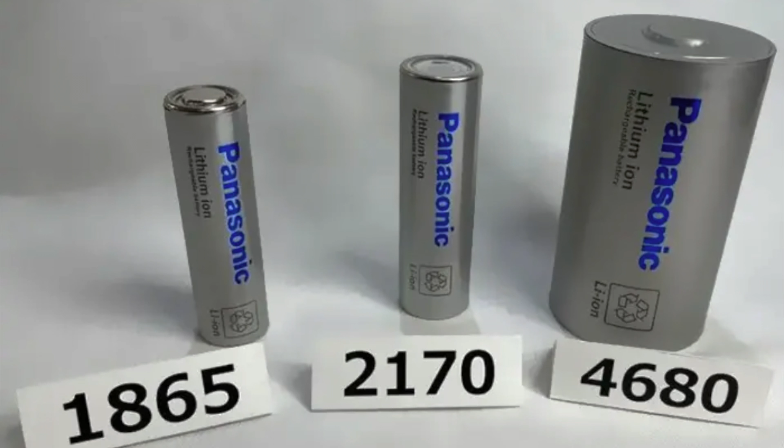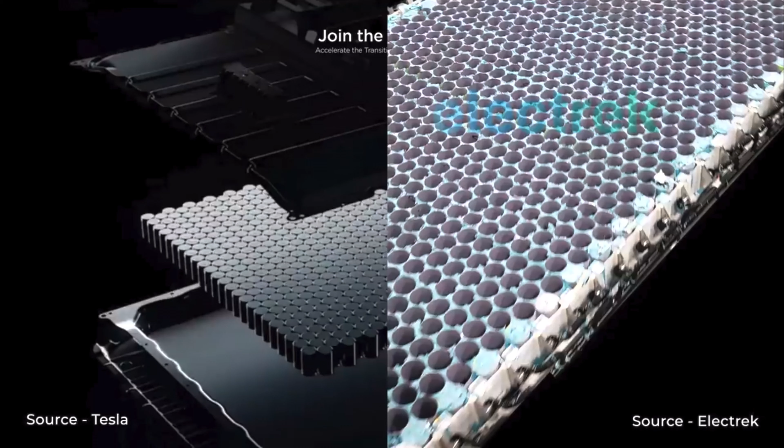Then, of course, you see the Panasonic batteries that have evolved for Tesla, and the 4680 is the largest battery that they make right now, and it's the one that's going to be going into future cars. And that structural battery pack will be using those 4680 batteries as part of the battery pack to get more power. So Panasonic and Tesla have partnered up to make bigger and more efficient batteries as well. It's really pretty cool.

Now, the 4680 refers to the size of the battery. It's how many millimeters around it is, how many millimeters tall it is, but it has an energy density that allows it to store a certain amount of energy in it. And these new batteries are remarkably efficient. You get 5 times the amount of energy out of it, which is really pretty amazing. Just how that works is really cool.

So of the old cells, you can take 5 of those away and replace it with 1 of these and get more kilowatt hours out of your battery and have more power. So these batteries are really efficient and use that property better. So this is really kind of an important step for Tesla and Panasonic to make in the battery industry.

It's always that question about how do you gain the efficiency and how do you make sure that your batteries are going to continue to perform at a level that you want them to do. And by continuing to create new battery types and evolving the thought on it, you can see that this one is actually kind of flat across the top, so it doesn't have the tab, so it's actually more efficient that way as well. So it's really pretty cool. They've really thought this through and come up with something that's a much better and much more efficient battery.

Moving on, there are other companies that are coming up with things that are more flexible type batteries. If you look at this, it does have the tabs, but it's a completely flexible battery that you could put in other parts of the car. It doesn't have to be under the car necessarily. And you're getting some sort of energy efficiency out of these particular flexible batteries. And that allows you a lot more flexibility in how you put the battery in the car, where you use it, and how you draw energy from it.

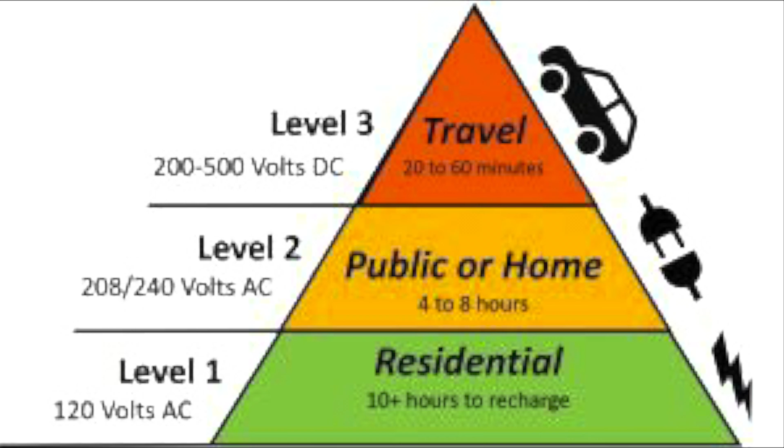Moving on, let's talk about charging. Now, as you know, there are a couple of different ways to charge. So you have level 1 charging, which would be like your home charging 120 volts. You have your level 2 charging, which is more like your 240 volts at home charging. And then you have your level 3, which are your superchargers and beyond. So your superchargers, you have them spread across the United States.

Ford is also putting in a charging network that will be very similar to it, and they're part of the way along. There are other companies that are coming together and putting in these charging networks that will charge well above 240 volts, and you're starting to get there. There was another story that came out that 53 energy companies are coming up with their own network that will also be able to charge across the country. Pretty impressive when you stop to think about it.

Now, of course, home charging at level 2 is pretty efficient if you're just going to be parking your car at home. That's very easy. A lot of companies these days make a perk of being able to charge at work, where you can actually just plug your car in while you're there. And this is a nice perk to charge your car while you're actually up at your desk doing work. So more companies are offering it. Now, on the other hand, apartment buildings, there's still a gap, but more apartments are offering charging.

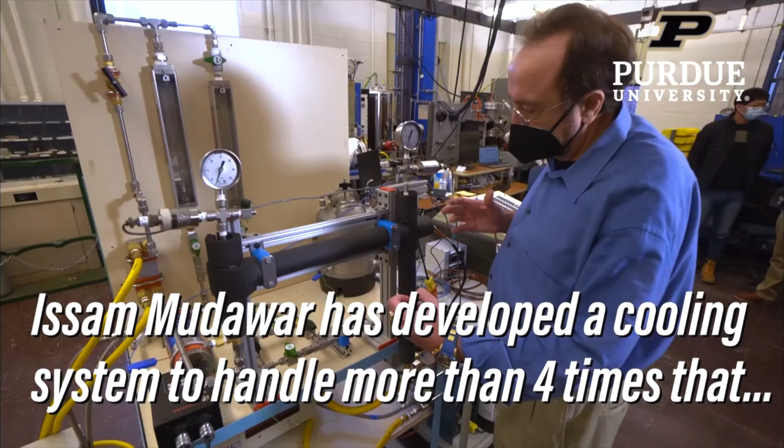So you have the methods of charging, but you're still limited by the heat that's created through charging. So you can go up to a certain amperage, but then there's a cutoff where the heat becomes too much and you have a lot of loss due to heat. So the idea by Purdue University here, among others, is to come up with a way to cool the cabling that goes in, so that way, when you're doing your charging, you don't have that limitation. You're moving that upper cap because the heat isn't produced, and you can actually increase the amperage and put more kilowatt hours in your car more quickly.

This is really, really cool. And it's really amazing what technology can bring you. They're thinking through, how do we solve for the problem of upper limit of charging? And this is kind of a solution they've come up with. It's actually going to revolutionize the industry, because now you could actually theoretically charge much more efficiently and much faster.

And now let's move on and talk about storage methods and some of the changes to the way storage is working. Here's some interesting information from Our Next Energy and some of the things that they've been working on in terms of changing the paradigm about energy storage.

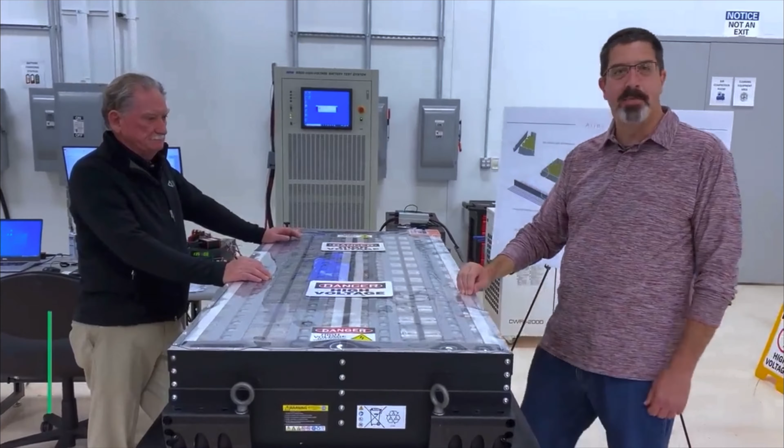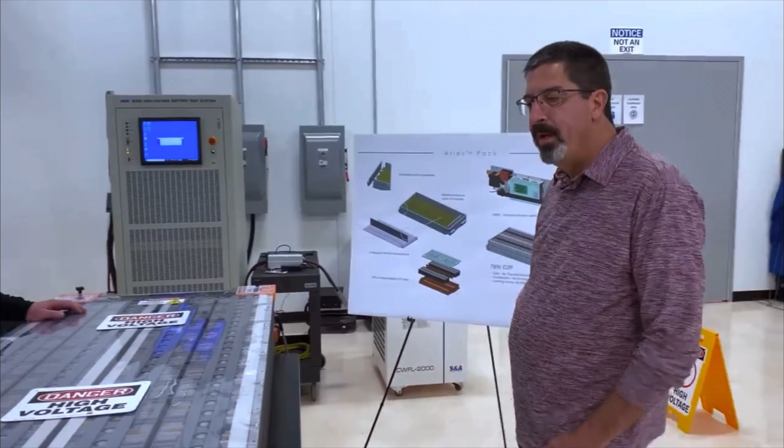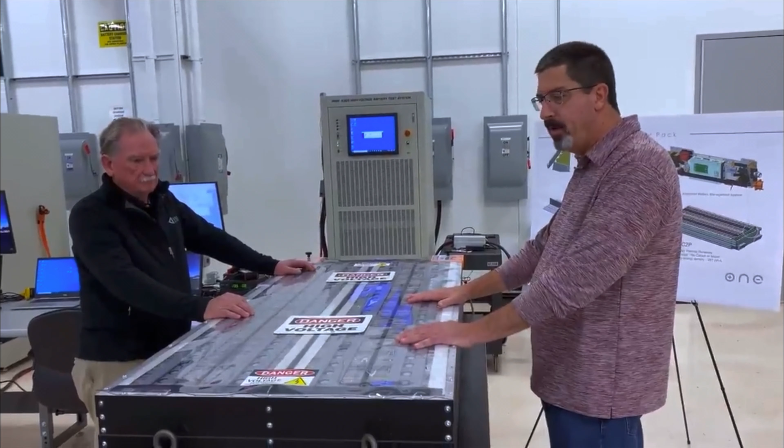This is our Aries pack. It's 108 cells of lithium iron phosphate chemistry in series, about 79 kilowatt hours. What makes this really unique, Sandy, is that instead of using a modular approach that's traditional in lithium-ion battery products, we've gone directly, taking the cells and installing them directly into the pack to make a structural element out of the cells. And by doing that, we've achieved about 76% volumetric cell-to-pack energy efficiency.

That's world-class. What we do is we literally stack these cells in here, and we do all of the cell compression, retention, and location directly into the pack.

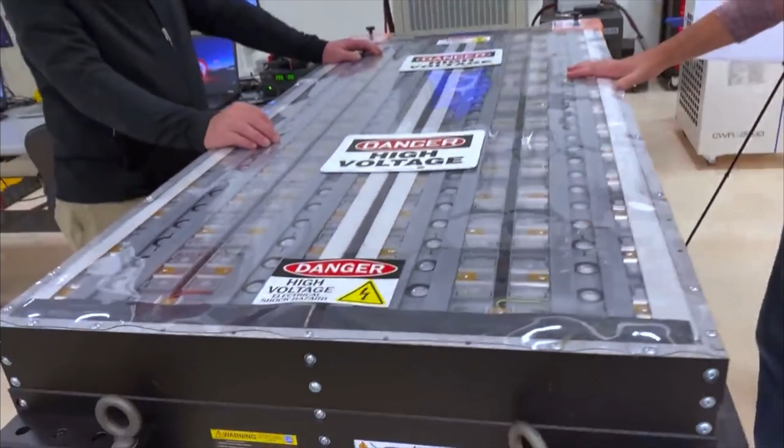And then you have a case study from Nissan where they're talking about how they want to change the paradigm as well. They were one of the first companies to create a battery and an electric car with the Leaf. And now they want to change the paradigm and make it more efficient too. So they've got some interesting ideas on what they're doing. This is really, really cool.

The industry is moving so quickly at this point, and there are so many things happening. You have to stop and wonder what's going to happen next, because even in the time that it took me to record this video, things came up that were so different from one week to the next. It's really pretty amazing how quickly technology is evolving.

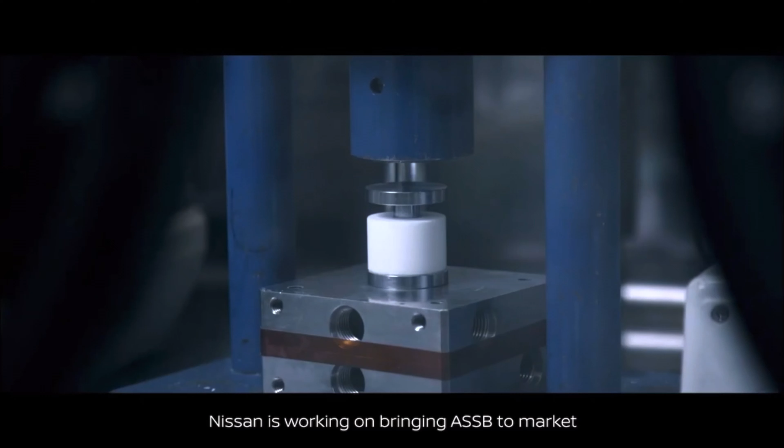And then we have this rather interesting piece of information from Dalhousie University that's up in Canada. And they're doing some really interesting work in terms of energy storage as well. I'm excited and pleased to welcome Chongyin Yang and Michael Metzger as new assistant professors and chair holders here at Dalhousie University. And they're going to join our partnership with Tesla, which is going to be renewed until 2026. They bring us new ideas, new expertise, new methods, and a renewed commitment to renewable energy and electrified transportation.

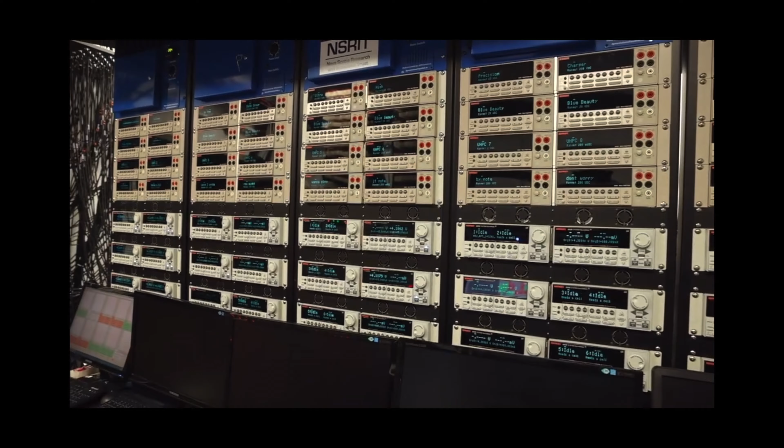We need grid energy storage so we can store the power from solar panels and wind turbines for use when the wind is not there and the sun is not shining. And the batteries for those applications need to last as long as possible, be as cheap as possible, and be as sustainable as possible. And that's what we work on here.

I got my PhD degree back in China, studying material science and electrochemistry. So 5 years ago, I took a job as a postdoc at the University of Maryland, working mainly on aqueous lithium batteries. My own group will continue the partnership with Tesla, trying to find an advanced material for the high-performance lithium battery, working with Tesla's agenda.

And another focus will be sustainable electrode materials, trying to use low-cost, high-performance, and especially no transition metal materials, which will certainly give us a low-cost choice.

I graduated from the Technical University of Munich in Germany. That's where I did my PhD. And for the past 3 years, I worked in the Silicon Valley tech industry. I think it's a really unique opportunity for me.

I'm very excited to join the partnership with Tesla and work with Jeff and Chongyin, who are really incredible personalities. All in all, the goal for me is to enable sustainable energy, mobility, and water, which I think is well aligned with Tesla's mission.

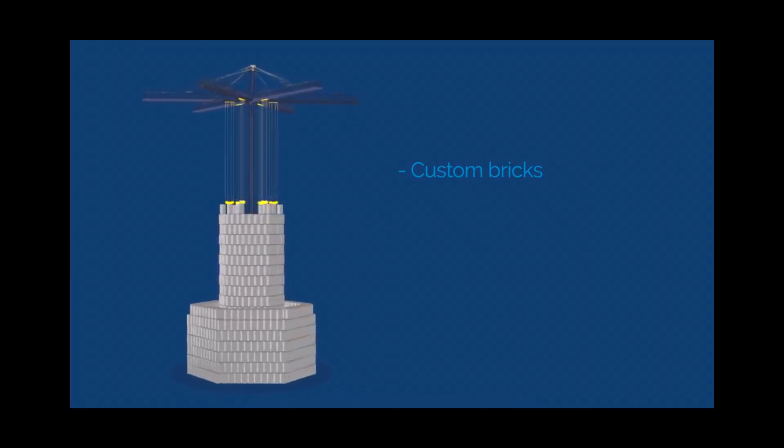Energy Vault, a low-cost electricity system based on gravity and kinetic energy, creates energy storage that finally allows renewables to deliver dispatchable and baseload power at a price that is competitive with carbon-based sources. Our product consists of a collection of custom, inexpensive bricks, a unique 6-arm support crane, electric motors, generators, sensors, and control software, which combine to deliver a 30-plus year life and round-trip efficiency of around 90%.

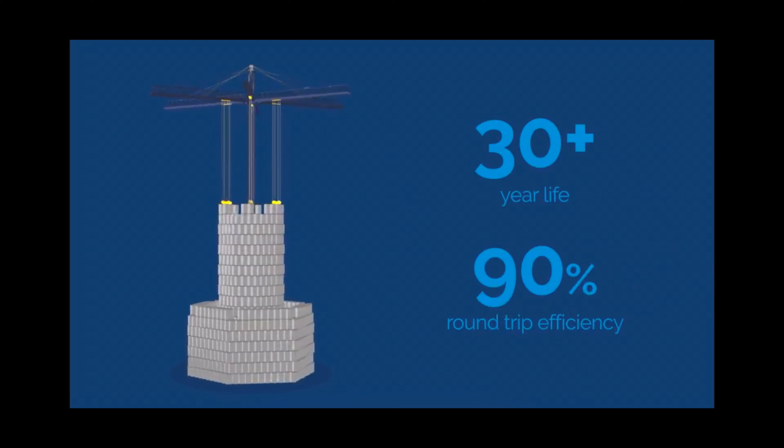As the crane lifts the bricks, the energy is stored in the elevation gain. Electricity powers the electric motors to raise the weights from the base state, building a self-supporting tower, which is the charge state. Each stacked tower of bricks will have a capacity of between 10 and 35 megawatt hours and a power output of up to 5 megawatts.

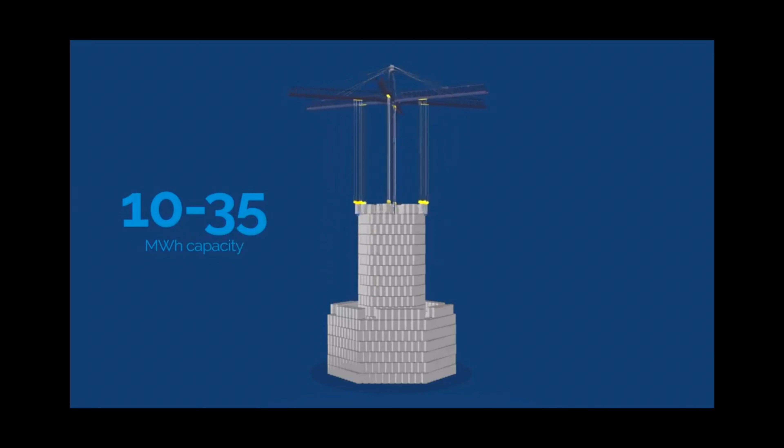When the time comes to discharge, the crane simply returns the bricks to their base state. The kinetic energy from the falling brick turns the motor, previously used to lift a brick, into a generator. This then passes the electricity through an inverter and out to the grid. Our specially engineered control software ensures that each brick is placed in the exact position each time, and even takes into account the effects of extreme weather conditions.

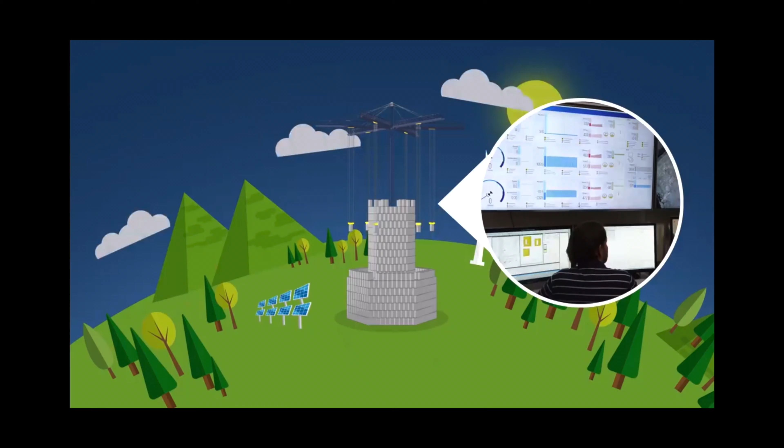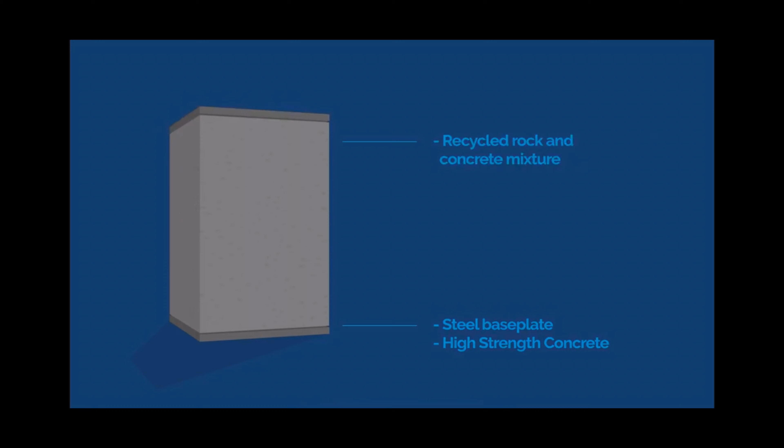The plant is unmanned, with many plants able to run from a single control center, allowing a quick response to market signals in real time, day and night. Our custom bricks are the perfect combination of a steel base plate, a high-strength concrete bottom, plus recycled rock and concrete mixture, allowing gravity storage to achieve a radical price-performance breakthrough.

Bricks can be personalized, either to blend into the environment with a single color, or each brick can be considered an individual pixel and used to create a picture or company logo. We have come a long way in replacing dirty, carbon-based fossil fuels with clean and renewable resources. And now, with Energy Vault systems delivering long-duration energy storage at low levelized cost, we can start to believe in a fully renewable world for the next generation and beyond. Energy Vault,

Enabling a renewable world. And now let's spend a minute and just talk about hydrogen and hydrogen fuels. So an interesting thing happened. In the early 1990s, there was this big bet on hydrogen, and Toyota was all in. They were very interested in creating something that was hydrogen fuels. And they never got away from that, and that's part of the problem here.

It became clear that hydrogen fuel is not the answer for cars, but it was interesting that Toyota stayed on that track. And I think the inherent problems with it can be summed up through this video that I found that I thought was really pretty interesting. They do a nice job of kind of highlighting the issues.

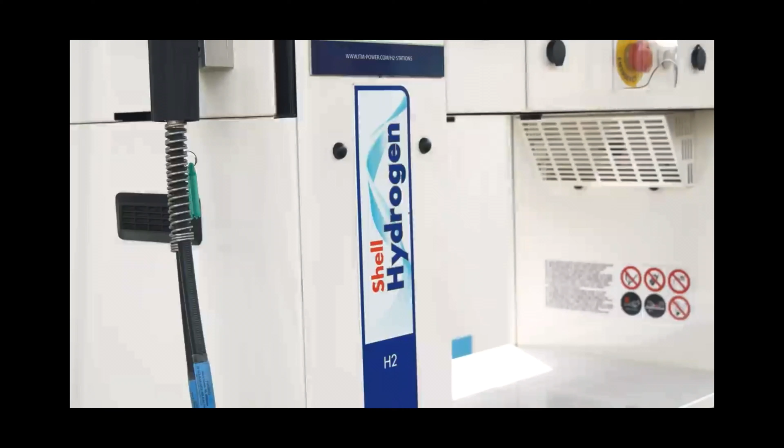So we're at a motorway service station just off the M25, and there is a hydrogen pump just here. Now I'm going to show you that actually putting hydrogen gas into the Mirai isn't a world away from putting petrol or diesel into your fuel-powered car. So the first thing you have to do is there is a payment card setup thing that you have to do. So we've done that, Toyota's provided that for us. And then once you set all that up, all you've got to do, press a few buttons on that screen,

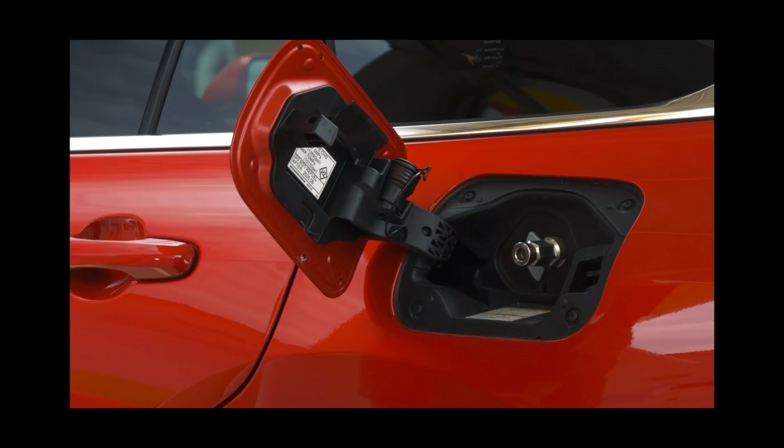grab this pump here. You've got to then attach this nozzle to the car, and it's very important that you lock it into place. Then you go and press the start button. That was definitely 5 minutes later. So dramatic pause, but it started putting hydrogen gas in, and it's doing so at 10,000 psi or 700 bar, which is pretty intense if you consider that the tyre pressure on the Mirai is 33 psi or 2.3 bar. So definitely not something that you want to be messing with.

And it really just takes as long as it takes to put fuel into your fuel tank, and certainly doesn't take anywhere near as long as it does charging up your electric car. Okay, so the numbers have stopped going up. The green light on the start button has stopped flashing, so that means that it's finished, and it does that automatically. So now what I've got to do is unlock here. Whoa, and it feels really cold. That's cool. And you can see it's actually frosting a little bit around the tip of it.

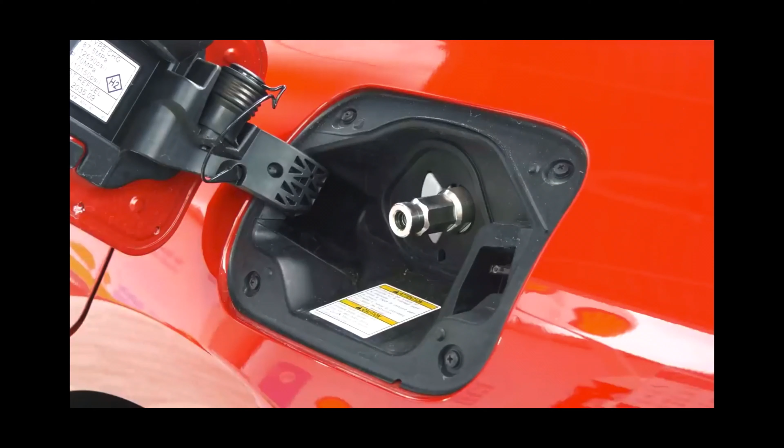So then you just take that off, put it back, and then all you've got to do is put the payment card back in, and away you go. So you get a big range. It's really easy and simple to fill it up. Why doesn't everyone just buy a hydrogen car? Well, there's a few reasons. The fueling process may be easy and quick, but there aren't many places to do it. And when I say there aren't many places to do it, I mean there are 11 places in the UK to do it. 11. It also isn't exactly cheap to fill up.

So the Mirai can hold 5.6 kilograms of hydrogen gas. So at the minute, it costs £12 per kilogram for hydrogen gas. So to fill up the Mirai costs just under £70, which gets you 400 miles, which doesn't sound very cheap. And it's not just the inconvenience or the cost of filling up that might put you off, but it's the cost of the car itself that could do that as well. The Toyota Mirai starts at a whisker under 50,000.

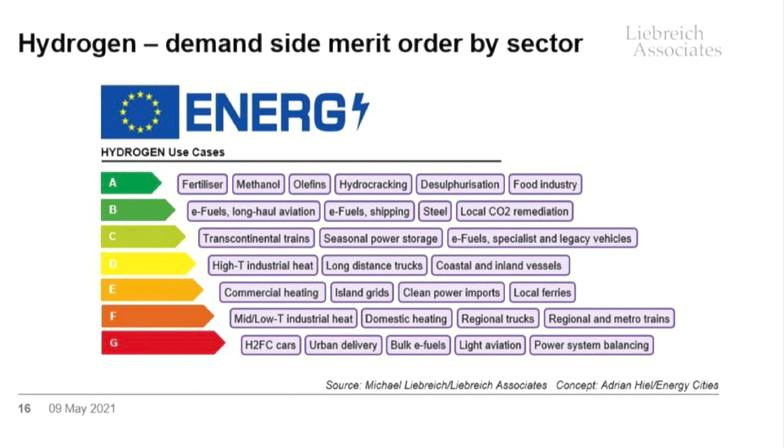And as a point of reference, from the European Union, they discovered that hydrogen fueling cars is probably the lowest priority among all the priorities you could put hydrogen fuel into. So consider that when you think about hydrogen in the future. And that's my story about storing energy. And that's why cars and electric cars to this point really only use batteries.

But you can see the technology is really changing. So hopefully in the near future, really seriously, the near future, we'll actually get to see something different, and the energy storage will become more efficient and better.